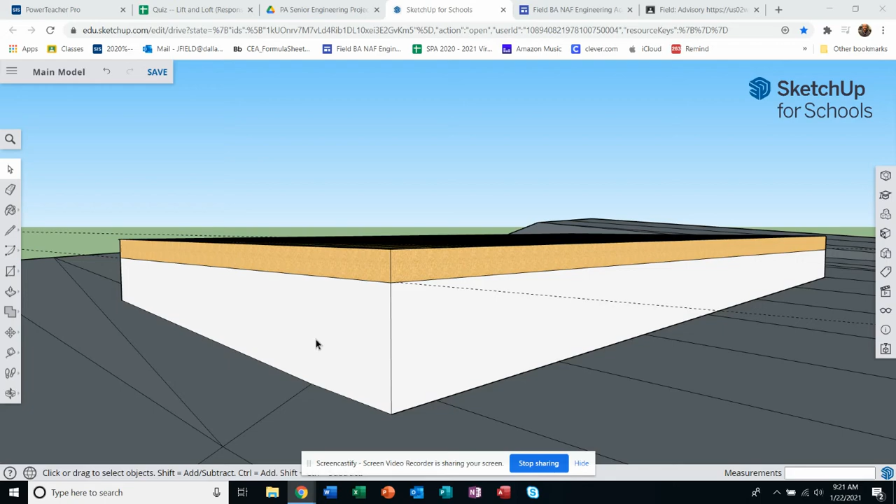Okay, so for stage 4, we're just going to start to build up this first floor and add the dormer upstairs. So I'm asking that we stick to that as a project. We'll stick with just 2 floors and just have a dormer upstairs, which is just kind of like a half upstairs, not really the full length.

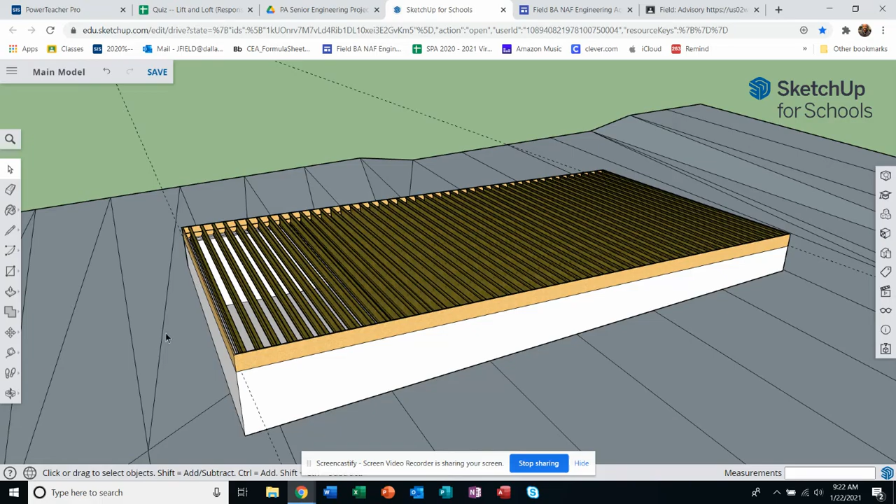I think on my project I'm going to eventually make this all like a front porch and then come out here. I'm sort of planning my floor plan in this project as I go along. I haven't really mapped it out exactly yet, but I'm going to go ahead and put exterior walls in just to rough them in.

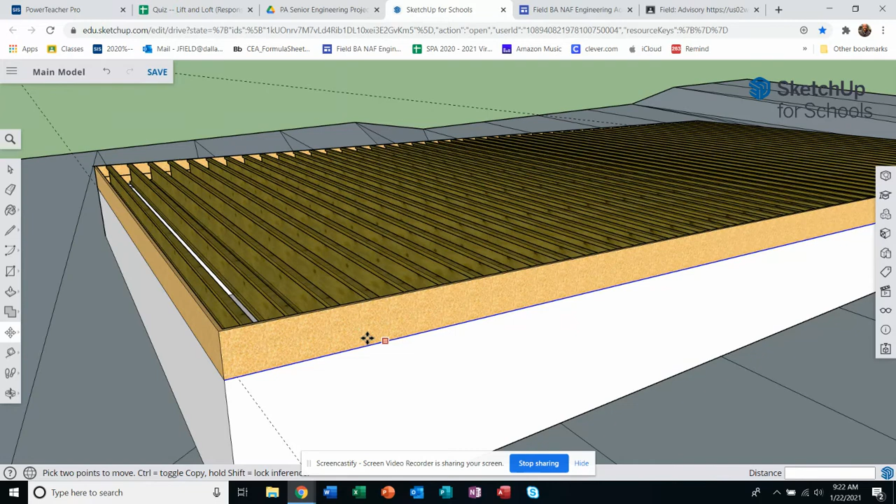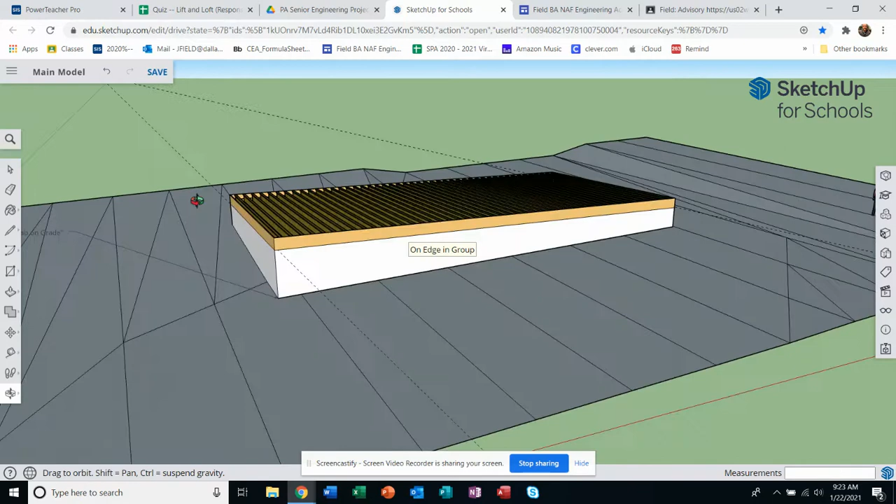The fastest way I've figured out to do this, or what seems to be the easiest way, is to grab our move tool, hit control, come up here to that line, and you want it to stay in axes. There we go. I'm kind of all over the place here. I don't know if the model knows how to make sense of me.

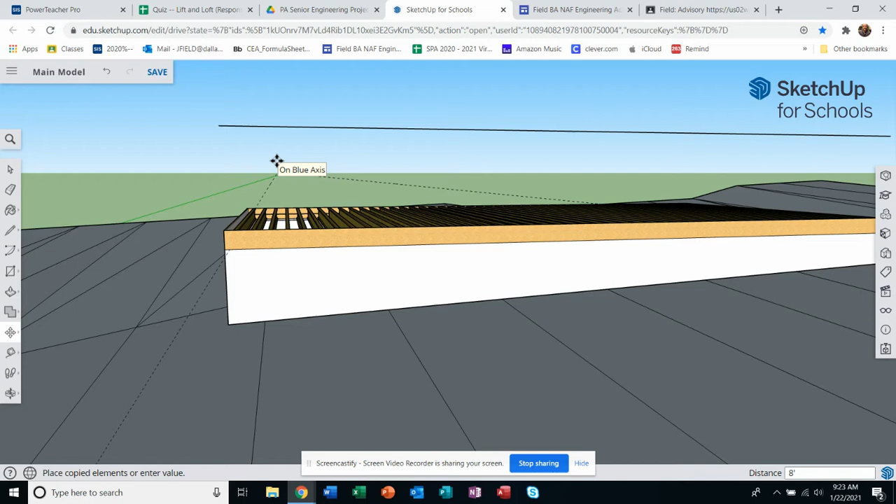So I wanted that to stay aligned vertically, that's what I was talking about. So the spacing on this for the second floor, let's do 8 feet. That's pretty standard. If you decide you want to do 10 feet because you're doing a modern style, that's fine, but 10 can be harder to work with stylistically. Be cautious there. 10-foot ceilings are really nice, it's a luxury feature, but 8-foot floors are easier to manage and fit with the style of most houses already in our neighborhoods.

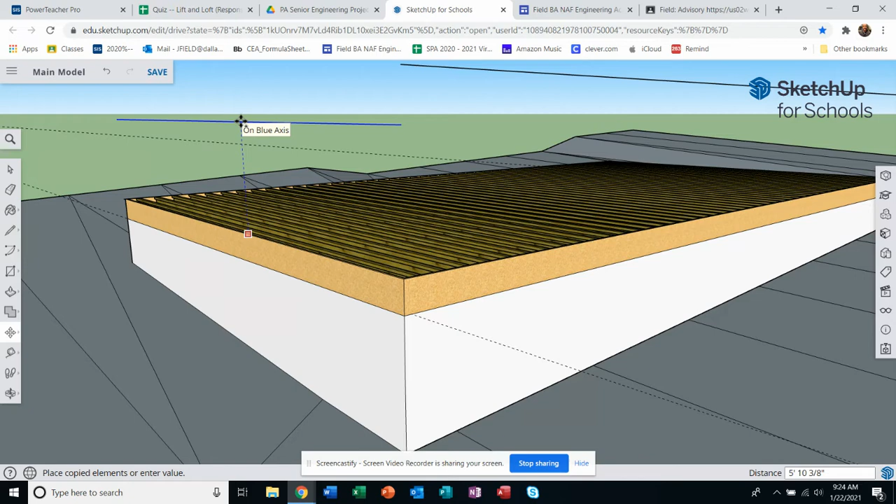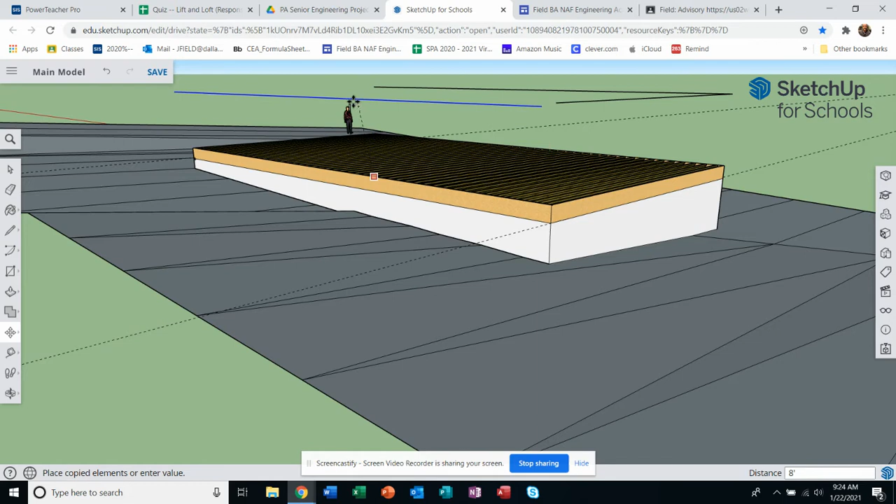Okay, so I'm going to hit move again, hit control. I think I'll have less trouble if I find an endpoint on this line rather than the midpoint. I'm just going to drag this up, making sure it's projected vertically, 8 feet. There it is, 8 feet. Now it's reading my... oh, thought it did. Enter.

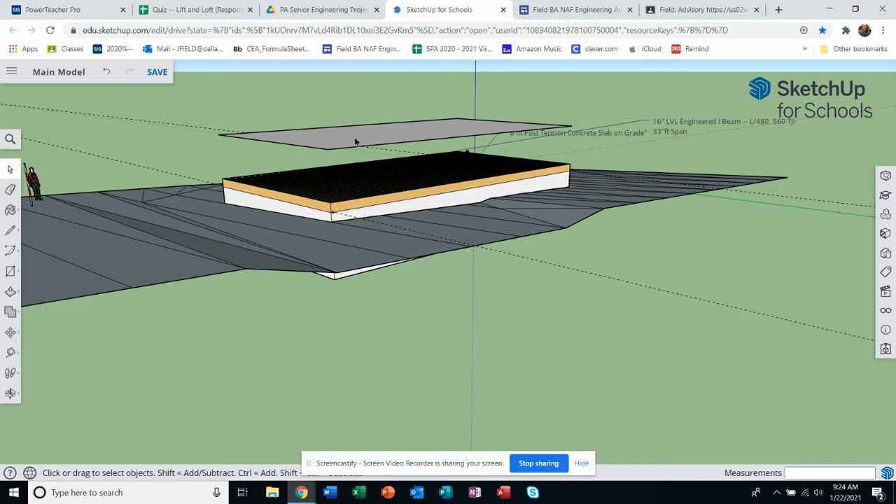Actually, I didn't even have to do that on this last one because I can just come in and finish that up. Actually, I don't want that face on there, but that would be a second floor, so that's okay, I guess I'll leave it in. And then I could go put in the edges, and I can even take this all the way down and start, but I think we'll just do the siding after we've got these walls roughed in.

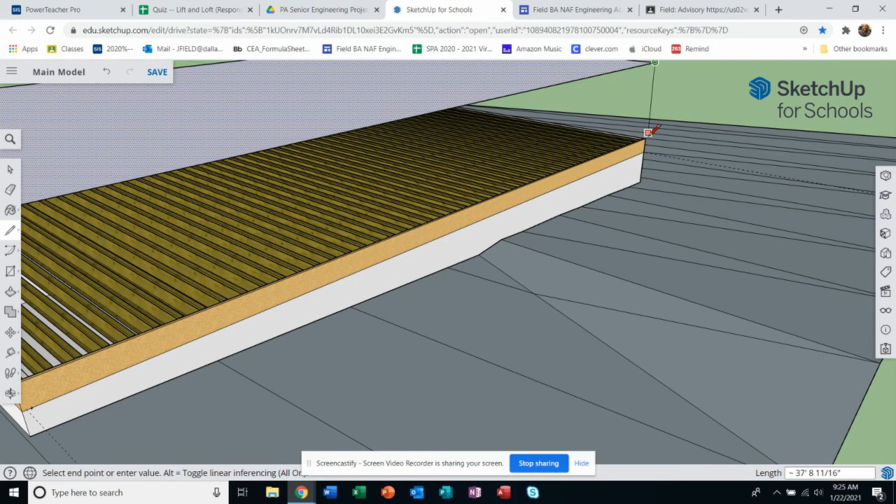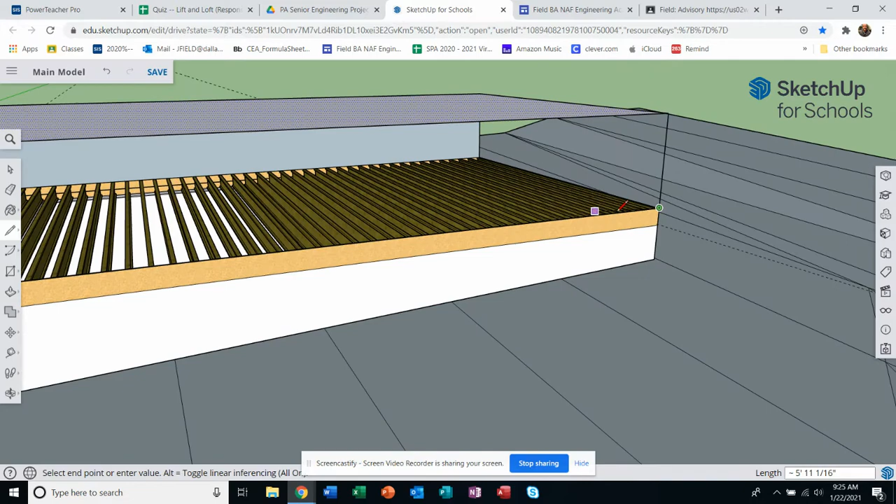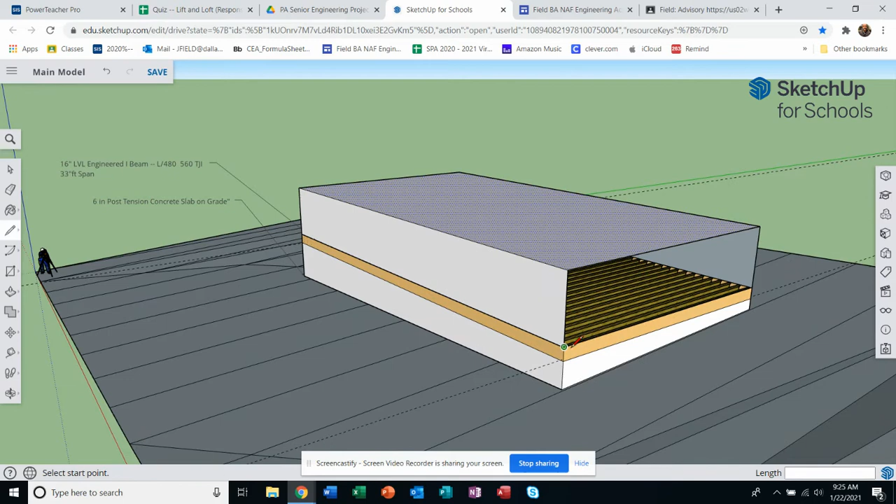So I actually hit escape. What I'll do is go from there, there. Why didn't that one work? Did I not go to the right spot? Well, that's something, I don't know why that wall didn't just close. That did that time, no panic. Yeah, that's all I got to tell it. All right, there it is, good.

And on this next step, for the dormer, on mine I like to leave a lot of room for my dormer upstairs. So I'm actually going to plunge my roof line up to 10 feet on the second floor. That may be a trick you all want to use as well.

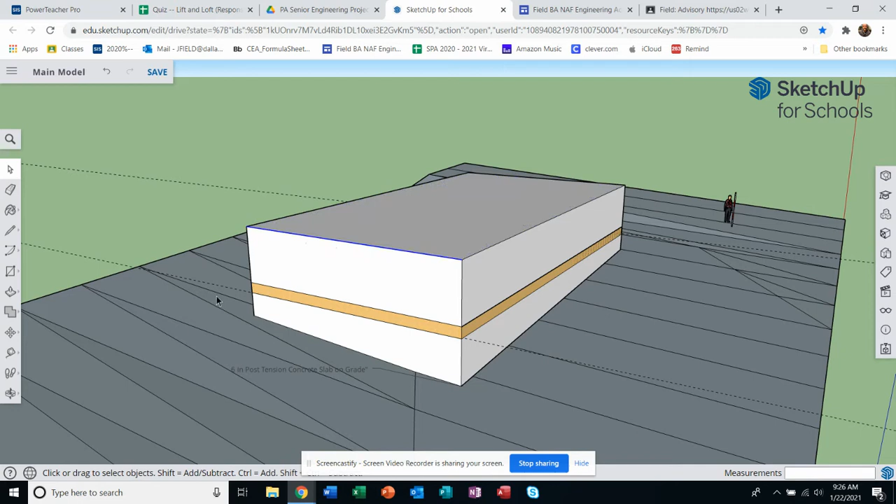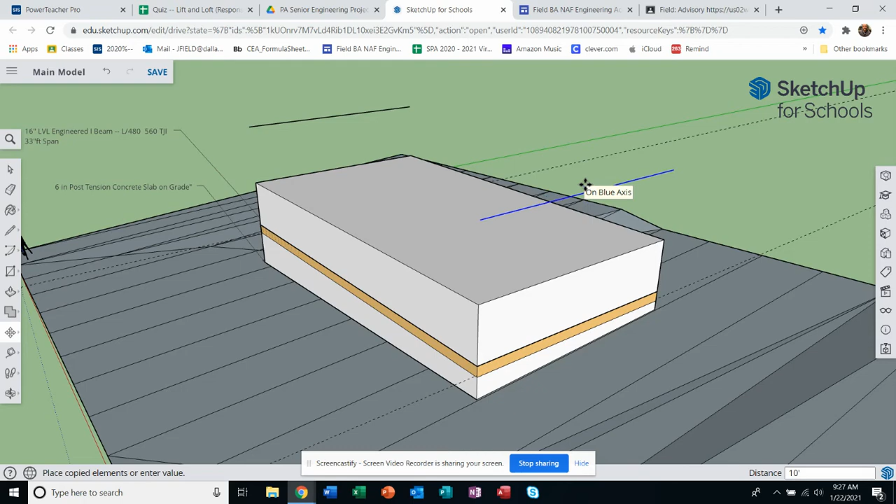Before you do that, the best thing to do is use the move tool, copy, hit control, copy it—actually, just that line. So you may want to pick that line first and then go move it, hit control. Now this one I want 10 feet. I'm going to do that one more time back here. Let me go pick this line, move it, control, and now I can kind of rough in my roof as well.

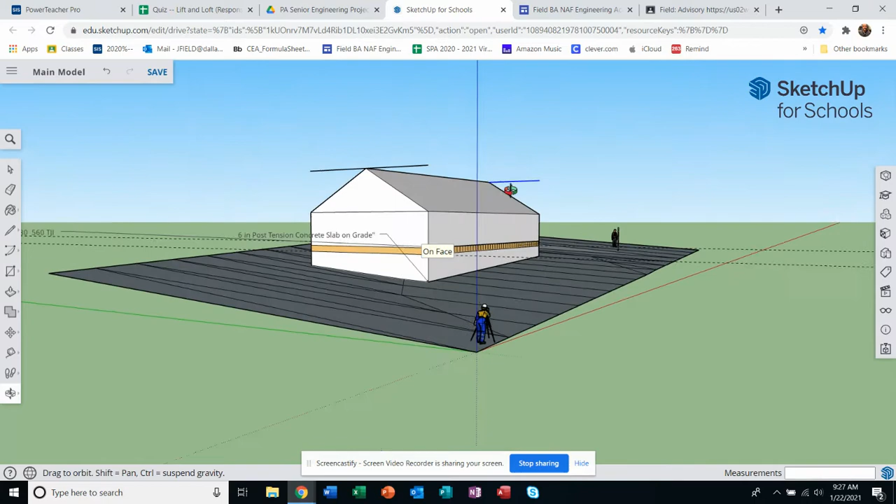So yeah, I'm pretty pleased with this. I feel like this is actually good proportions, a pleasing shape. I can start to detail my windows, my porch, my side entrance. I'm going to put a garage over here. I can think about where my landscaping is going to go, my steps, windows.

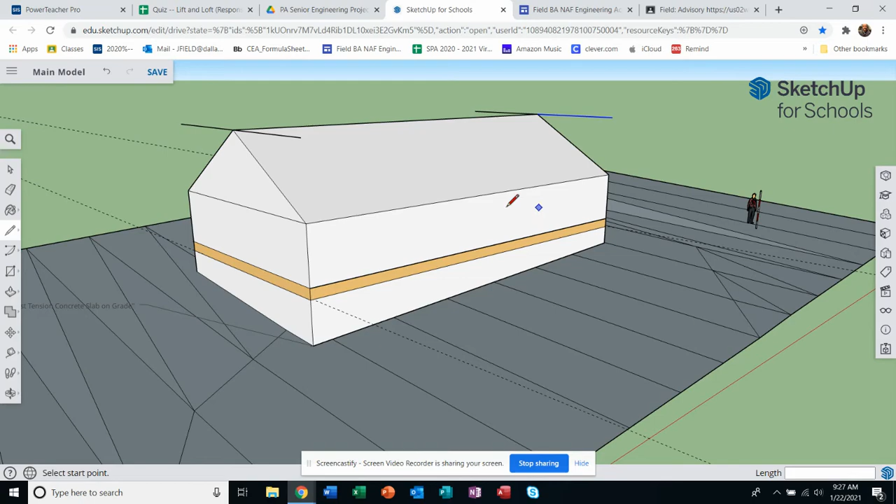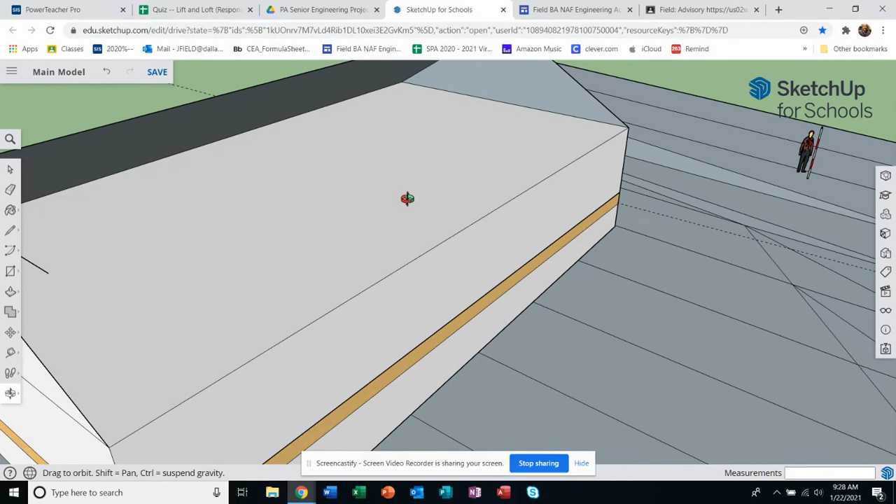What I want to show you is that we're not going to detail all the framing in the walls. We're going to just do breakout details to define that for the builders. What we are going to do, though—for example, I'm going to go ahead and delete this one back out, and maybe I'll also delete this side wall out so we can see this.

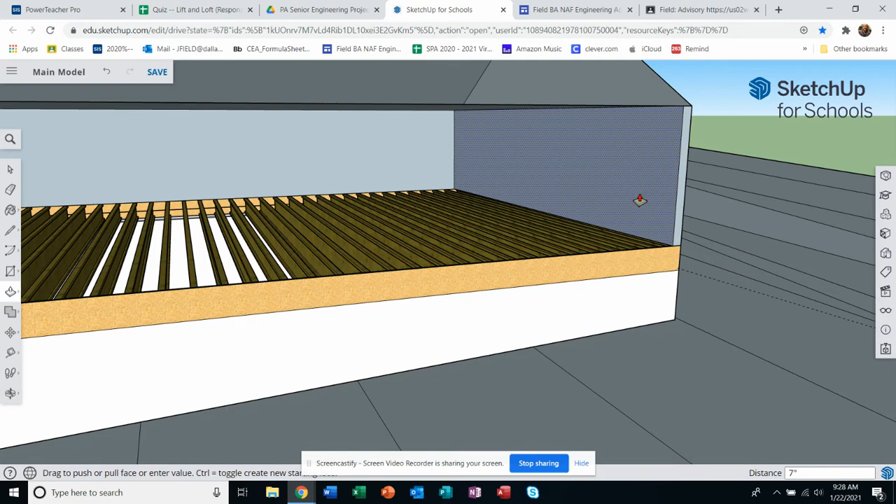Say that since we want to have a 2x6 wall, which I think I've pretty much convinced you that's what you should definitely build with, we can go in and extrude that, and a 2x6 wall will actually, after the drywall is on, be a 7-inch wall. So you'll just type in 7 inches, or it'll default to 7, and that's the minimum thickness wall that we would want to do.

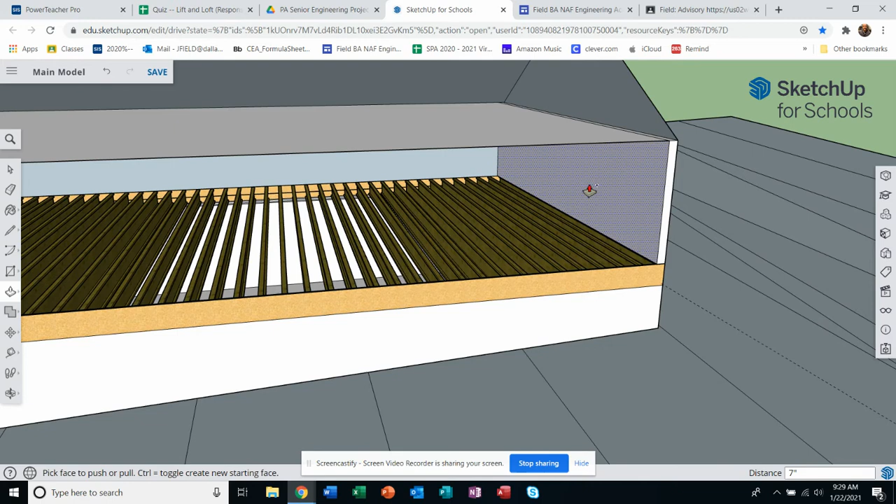So, oh, sorry guys, I think I have to hold control when I do this. Yeah, now you can see that face on the back side is still there, and we basically have our wall. So we'll go do that all the way around this as a next step, which you can go ahead and start doing, and then we can start detailing things out.

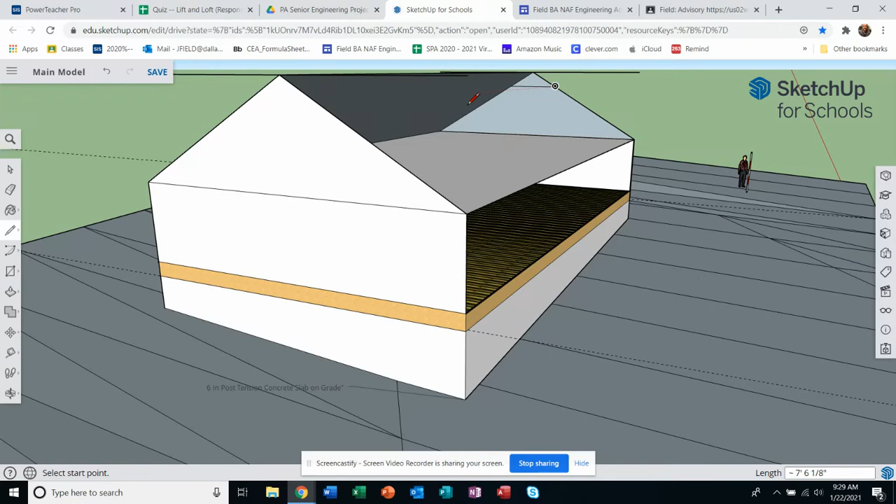And so you see I put this, and we'll add a note here to talk about the roof slope, since that's a key element of understanding. But you can see how much space I have in my dormer upstairs here now. The point I was trying to make is, since I generally want an 8-foot floor, my ceiling is probably going to be more like that on my upstairs, so you have at least some headroom to walk around without banging your head into the side of these slopes on the ceiling and the rafters.